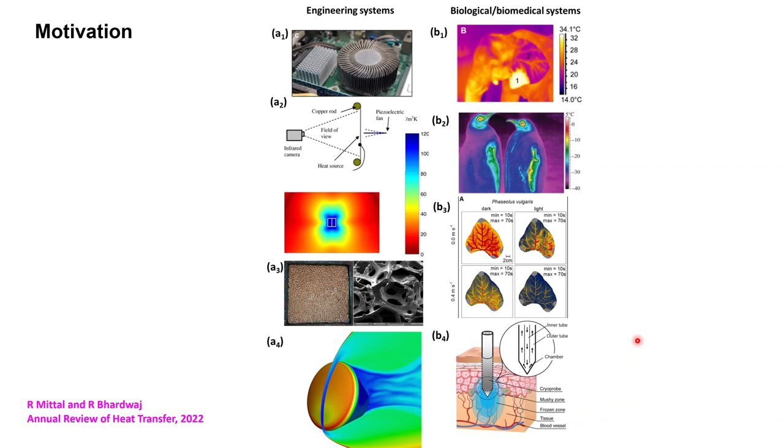So for any such system, what you actually need is to design it through accurate FSI modeling. That is the bottom line behind showing all these applications. A little bit more on that.

This is a similar idea but in more detail. Here a piezoelectric fan is used to cool the heat sinks, showing how different types of coverage could change the heat transfer.

This is an example of energy harvesting. These days there's a lot of talk about green energy and how we can go green. The available hydrokinetic energy, for example in rivers or flowing water, can be used as green energy by converting it to electrical energy through some kind of FSI system. There are already examples, and companies have been started based on this principle.

For example, Vivace is one company, with energy harvesting examples via flexible plates, such as piezoelectric plates. I'll talk a little more about this piezoelectric plate tomorrow in my last lecture. These piezoelectric membranes can also be used to extract flow energy, for example from airflow and wind energy.

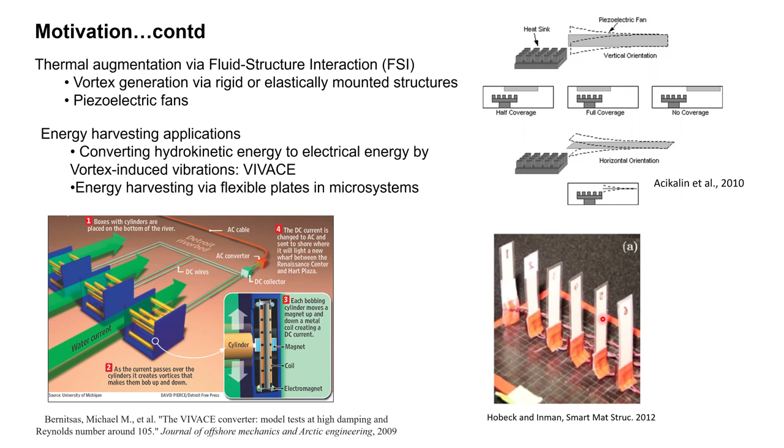So FSI modeling can be very helpful to design the system, to understand the dynamics, and to design our experiments. Let us see how we can model these systems and represent this moving boundary in a flow. Moving boundary problems in fluid dynamics are anyway harder because the boundary is moving and you have to account for many things.

With the advent of FSI, there are several challenges. For example, if the body is deforming, vibrating, and also exchanging heat with the surroundings, we are talking of multi-phase, multi-physics problems with several physics integrated, such as structural dynamics, fluid flow, and heat transfer, on top of complex 3D geometries and moving boundaries.

These boundaries can move rather than be stationary, and large scale structural deformation can occur, due to high pressure or low flexural rigidity of the structure, or very thin structures. When modeling solid mechanics or structural dynamics, we must account for geometric and material non-linearity, and when writing such solvers, we have to check whether the solver is numerically stable or not.

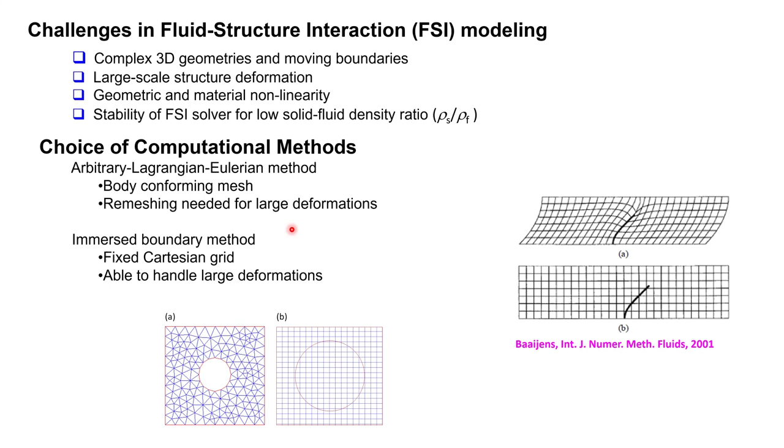So here in this talk, I'll mostly focus on IB methods, and IB methods also have a wide spectrum of methods, with a history of development of almost 30-40 years, and there are so many variants of these methods that probably some of you are already practicing and developing it.

I'll just go to selective IB methods, what has been there. If you are a beginner, this will definitely help you, because this gives you an idea about IB methods. If you are an experienced user, probably you can have a look and try to compare your variant of IB methods versus what I am showing here.

So the origins are in the 1971 thesis of Charles Peskin, where he wanted to model the fluid flow around a deforming heart. He modeled the heart in a two-dimensional geometry like massless elastic fibers.

Now, once something is moving in the flow, it's actually going to affect the fluid flow. He basically said that this movement happens, of course, with no slip boundary conditions. And there is a stress which gets generated in the elastic fiber because of the shearing of the fluid flow, or the shear stress, and that is also transmitted to the fluid. These fibers are actually massless.

Now these fibers can be represented with another grid, or another set of marker points, which we call Lagrangian markers. So now we're talking of two grids here, or two kinds of mesh. One, of course, is your fixed grid, Cartesian grid. And on top of that, you have Lagrangian markers, which are being tracked in a fashion governed by the fluid flow.

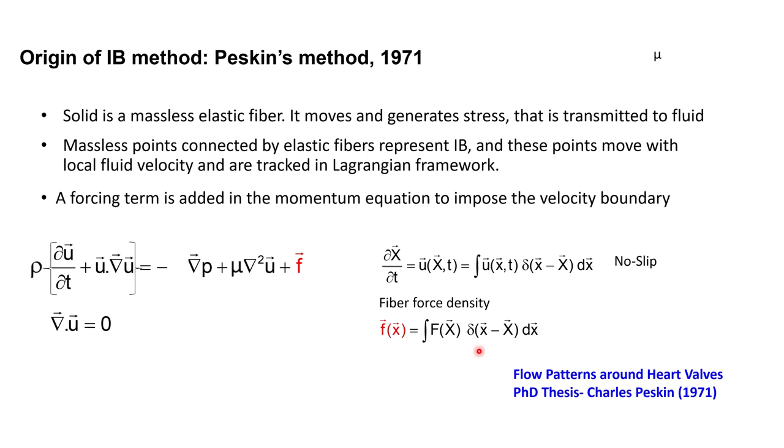Now let us see what could be the other approach. The other approach is not to add this source term. What I just explained is a primitive or earlier class called continuous forcing, which means I add a source term in the momentum equation, and everything is continuous, nothing is discrete, in the sense that I am solving the Navier-Stokes equations.

In order to account for this source term, I have to regularize it, which we will learn in subsequent slides. This will end up representing a diffuse representation of the immersed boundary, meaning the boundary condition may not be satisfied exactly on the interface, and we will learn how. That's why it is called diffuse. It will definitely be an approximate way to implement the boundary conditions, and to remove that limitation, the discrete forcing methods were introduced later.

The discrete forcing method's idea also remains similar, but not exactly the same. You have governing equations which you solve as you would without accounting for the immersed boundary. Here our immersed boundary is the surface of the solid you are trying to capture in the fluid, or any surface you have, and the flow has changed because of that. The main thing is what will happen to the flow when this boundary is introduced, with boundary conditions on the surface. So the discretization has to be adjusted near the IB to incorporate those boundary conditions.

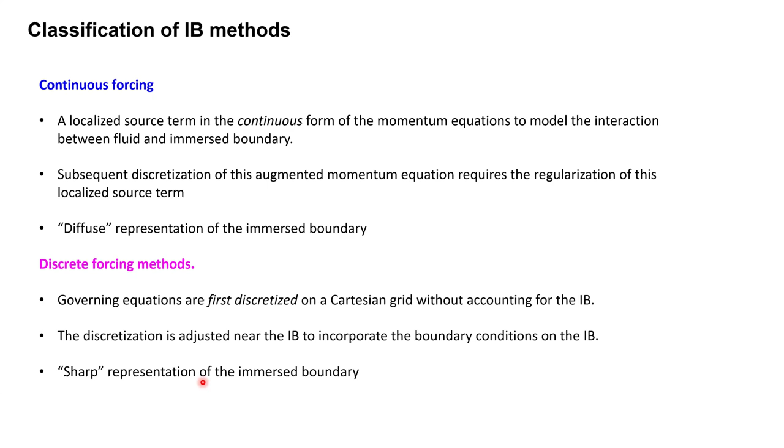And once I have those demarcations, I can apply boundary conditions on certain cells. We will discuss again subsequently what those boundary conditions are and how we apply them. But if you apply boundary conditions on these cells, which are very close to the interface, we have a sharp representation, in the sense that we are not approximating the boundary conditions on the interface.

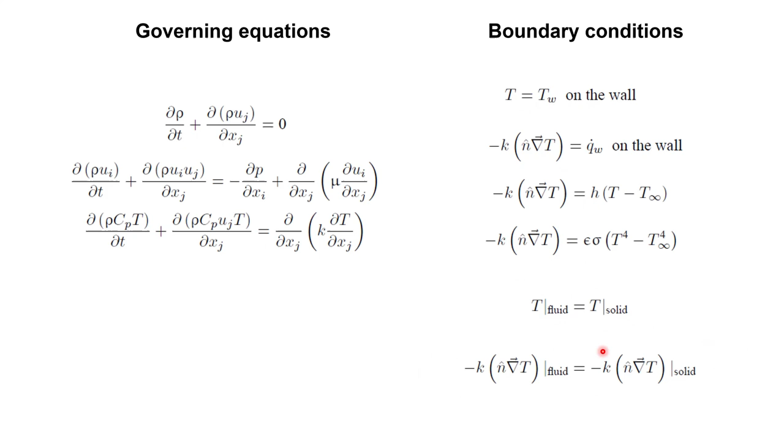So let us see this implementation so you will appreciate how easily we can implement a continuous forcing or a sharp interface IB method. There are a lot of equations on the slides. We'll go one by one.

And its units are watts per meter cube. And now this Q is implemented on the whole domain and the whole fluid.

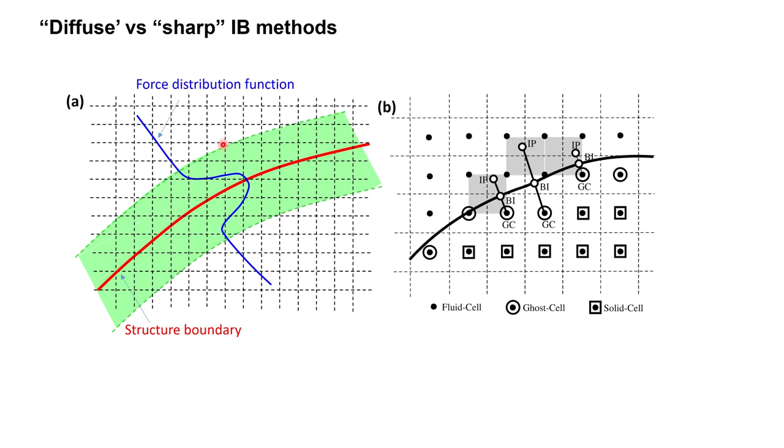But if you see this equation, it has notations i,j which represent the indices of the fluid, and then I have indices k to N, where N is the number of Lagrangian marker points. So if I go back to my figure to explain a bit more, I have Lagrangian points on this boundary, and then the indices of these cell centers are i,j. So this is the distinction, and k is the kth Lagrangian point. I have to find out that flux on each of the Lagrangian points, given by Q subscript k, and then multiply this with the discrete delta function, and this delta Sk is the spacing between the two Lagrangian points.

So the challenge here is to find this heat source distribution Q. Once I have it, I can solve my governing equation and get the results I want. So we determine the heat source distribution such that it enables the satisfaction of a thermal boundary condition, which could be a fixed temperature or heat flux on the immersed surface. One thing to note: this flux could represent any boundary condition. I have to determine this flux even for a constant wall temperature boundary condition - it is not just valid for a flux boundary condition, it is valid for all kinds of thermal boundary conditions. Whatever boundary condition is given, I have to determine this flux Q, the heat source and sink.

Now I can approximate the temperature at any Lagrangian point by the same approximation: any Eulerian temperature, if I multiply it with the discrete Dirac delta function, and multiply by h square, where h is my grid size, that approximates my Lagrangian grid point Tk.

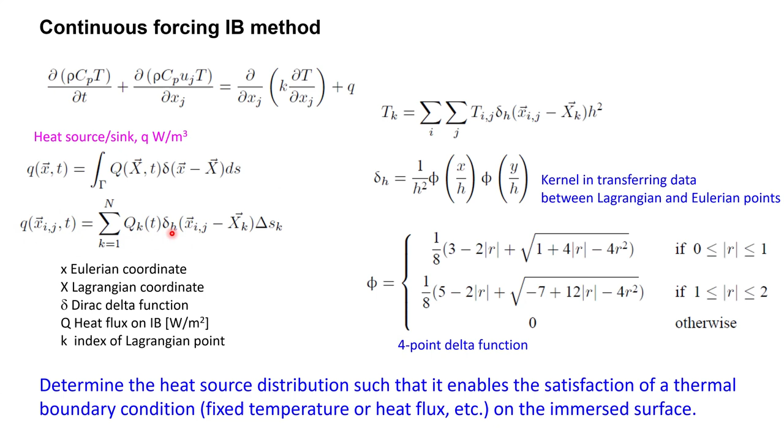Now I can substitute small q in terms of capital Q and recall this equation - you are probably with me. So if you see this equation, I can represent my Eulerian value for the heat source in terms of the Lagrangian heat flux. This equation I'm going to utilize, and once I utilize it, I'm going to get an equation.

Now let's look at this equation. This is actually our final form, just to solve and let us understand what we have done. Any Lagrangian point temperature at that particular time step which we want to determine can be given in terms of its corrector temperature with a discrete Dirac delta function, and also in terms of the flux on all Lagrangian points. When we substitute this, we get a sum over all the Lagrangian points - notice this M is for all the Lagrangian points, ranging from 1 to capital N. Then I get additional terms, all of which I know. What I don't know is this term Qm.

But luckily I have the boundary conditions, so I know this value because I know the temperature at the wall. Let us say I know the temperature at the wall, which is a Dirichlet boundary condition. I know the right and left hand side. This term also I know because I know the corrector time. What I don't know is this.

But now I can solve this Qn plus 1. But this is just one equation. I will have almost like capital N number of equations, because I have that many Lagrangian points. So actually I can solve a system of linear algebraic equations whose size you can easily determine, and the total points are from 1 to capital N.

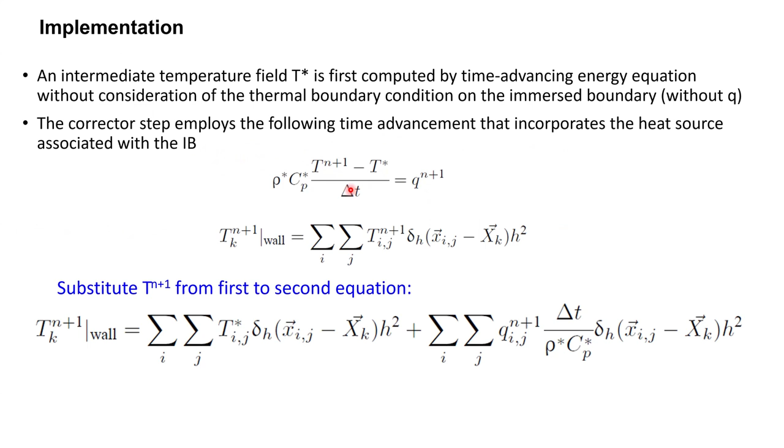And once I solve the system of equations, I can solve for Qn plus 1. Now Qn plus 1 is given to me, known. I can go back and use this equation to find Q, small q, that is my heat source, right? And now once I have this, I can go back to this equation and solve my temperature. So you can easily implement this source term given those Lagrangian points to find out your new temperature field. This is the implementation of continuous IB method.

Now, of course, you can argue, what if I'm given a different boundary condition? Other boundary conditions are also very easy to implement. Now let us talk of the flux boundary condition. For the flux, you can define an additional virtual layer of points which are equal to our total Lagrangian points, which is away at a grid spacing H outside the boundary.

Let us call it VB. Why call VB virtual boundary? Because it is anyway not there. This is for our computational tractability that we define and use this. And it's also aligned in a direction normal to the IB because we are using a flux boundary condition. Now I can approximate my flux at the wall as Tk at any Lagrangian point at the VB virtual boundary minus Tk at the wall, divided by H, because I have taken these points away at distance H.

Now if I rearrange the term here, I get Tk at any Lagrangian point at n plus 1 time at the wall in terms of the flux and Tk n plus 1 at VB. Now Tk n plus 1 at VB you can determine using interpolation, and that interpolation is something we are using already. So this VB value can be determined using this equation. This way I get a slightly different form of this equation for the flux boundary conditions, and you can also implement the flux boundary condition.

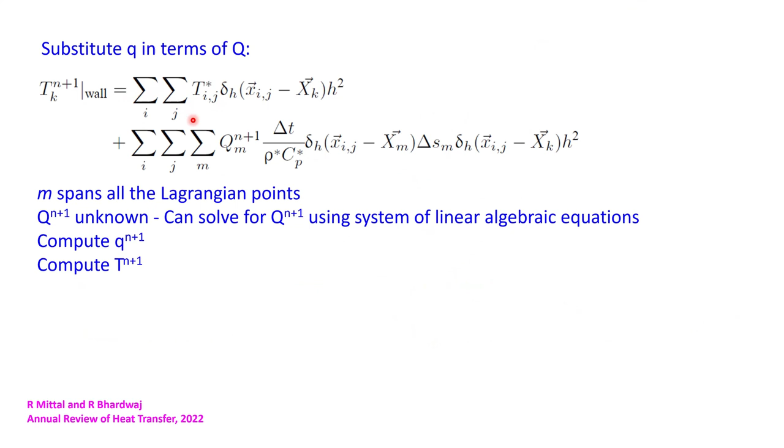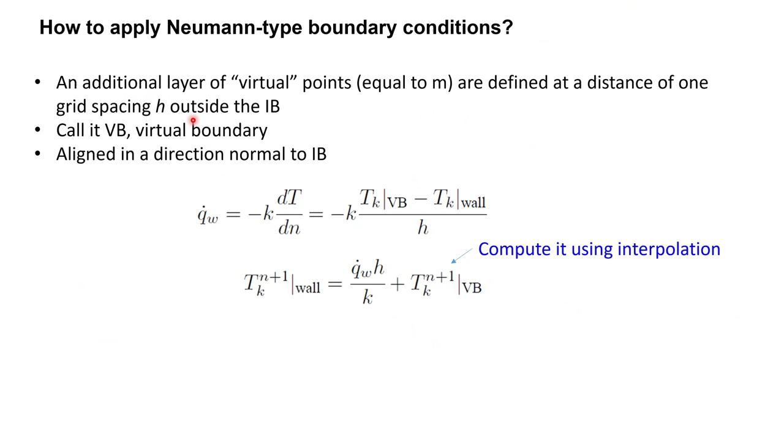With these two basic boundary conditions, you can also implement the mixed type boundary condition. You can also implement any radiative boundary conditions. So with this framework, you can easily implement the continuous IB method. Of course, you may have several questions regarding grid size and what if we refine it, and how the accuracy changes, and that's something we can also discuss once we have completed the presentation. But the bottom line is the continuous forcing method is easy to implement if you are given a geometry, and you approximate the effect of it using a source term in your governing equation.

So with this, let me move to the discrete forcing method. In that we have a different approach, and this is our boundary, the solid-liquid interface. What we need to do first is identify different kinds of cells. These cells are called solid, fluid, and ghost cells. Now we can see here, I am putting different kinds of dots. This is for fluid, this is for ghost, this one for ghost, and the solid cells.

So of course, cells which are in solid, they are solid. Cells which are in fluid, they are fluid. But what are the ghost cells? The ghost cells are those cells which are in the solid but have a closest neighbor to a solid... I mean to a fluid cell. So every ghost cell is a closest neighbor to the fluid cell. This is the definition of ghost cells, and we will call them ghost cells. I'll tell you later why.

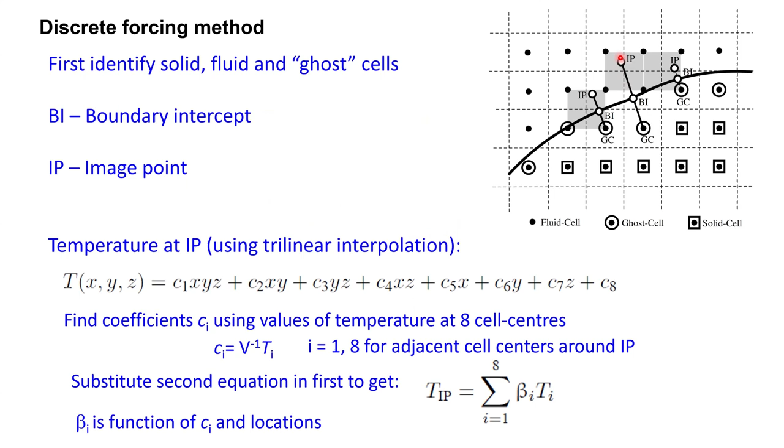One thing you can quickly notice is that we used a central difference method for the sharp interface, whereas when we applied the flux boundary condition for the continuous IB, we used a first order discretization, not second order accurate. So you can see the accuracy actually improves very close to the interface if you use the flux boundary condition this way. The sharp interface method is better, but it requires more framework and identifying the cells, so the computational infrastructure required is more than the continuous method.

On the other hand, the continuous method is easy to implement and also computationally inexpensive.

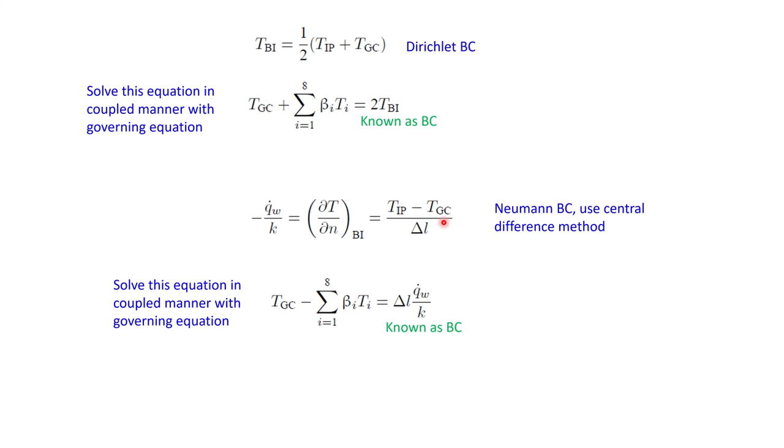Now, one last thing I would like to say is how would you implement a conjugate heat transfer boundary condition? That is something of an extension of the previous framework, and we can understand it very easily. We've understood how to apply the flux and the Dirichlet boundary condition in the previous slide, using the ghost cells and the image point, where ghost cells are in the solid and the IP is in the fluid.

Now, if you have a conjugate heat transfer, you are also solving the heat transfer in the solid, so you have to define something called mirror ghost cells and mirror IP. You can see in this figure where you identify all these cells, IP in the solid and IP in the fluid as well. First you do as you do for the solid and fluid, then you go back and do it again for the solid.

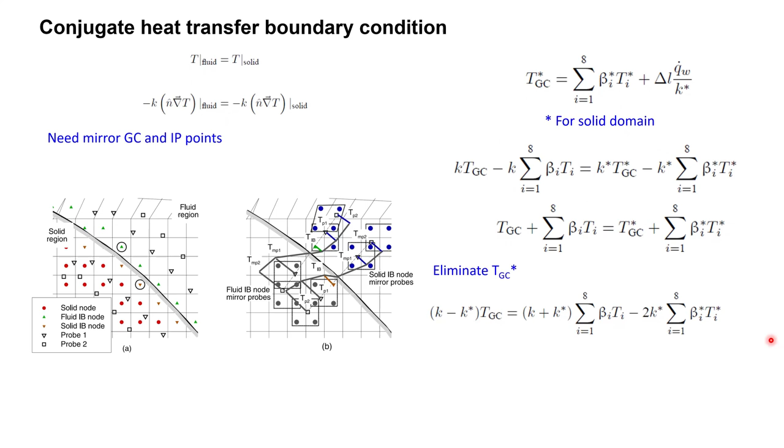So here is the formulation. This is something we have done before, but we just put the stars, which denote the solid domain. Once you have this equation, we can apply these two boundary conditions easily: the flux boundary condition at the interface, and the temperature condition. If you do some reworking here, you get a single equation which will ensure that your conjugate heat transfer boundary condition can be applied easily.

Okay, so this is just how to tackle the structure boundary equation in the fluid. Now, let's say you want to solve for the structure dynamics itself, and you not only have structure dynamics but also fluid dynamics, so you have two kinds of systems that have to be solved together.

Of course, it's much easier if you just make a single governing equation, which is actually called the monolithic approach, and then you write a solver from scratch that accounts for both together. This has been done by several groups as well.

But what is more common is the partition approach, because a fluid mechanician started to integrate structure dynamics into the code available to them. This is called the partition approach, where you have a fluid solver already, and the structure solver is something you get from somewhere, or it's open source code, or you write a small structure code, and then you solve it in an iterative fashion.

So the partition approach uses existing fluid and structure solvers. Of course you can write the structure solver yourself, but it's more common to use both existing ones, and it has a larger computational time compared to monolithic, because you have to iterate back and forth between the fluid and the structure solver.

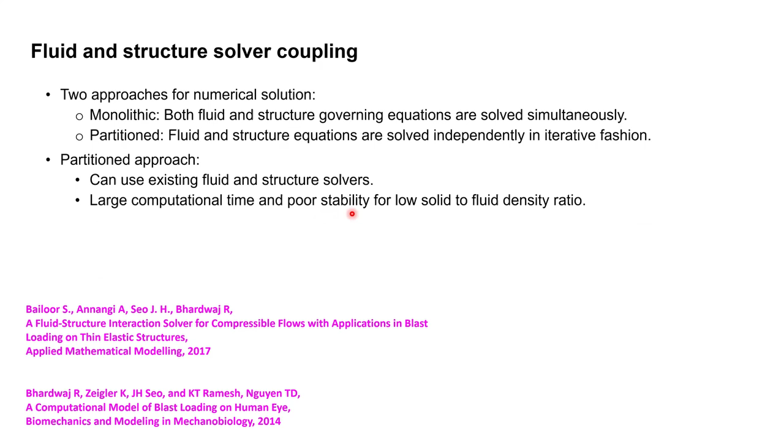And then once you are having two solvers, you are talking of stability issues, especially when things are moving faster and in large magnitude.

Okay, so partition approach works like this. You have a fluid, you have a solid, and you go back and forth to exchange the data. And this data is actually the boundary condition, kinematic and dynamic boundary conditions. So the first match is of the solid displacement and surface velocity in the flow solver and the structure solver. And the second match is the fluid dynamic forces on the structure, which will help in generating the stresses in the solid.

So these two conditions simultaneously should be satisfied while you are announcing a convergence to your solution. So fluid computation can be done on Eulerian grid if you are using an IB method, and then immersed surfaces which you can track in Lagrangian framework, either in continuous framework or a sharp interface. And then you may have another solver, structure solver, which may be using some scheme, let's say finite element method, and that solver also has to be coupled. So that finite element solver needs to see also those Lagrangian points, and the Eulerian grid also needs to see those Lagrangian points.

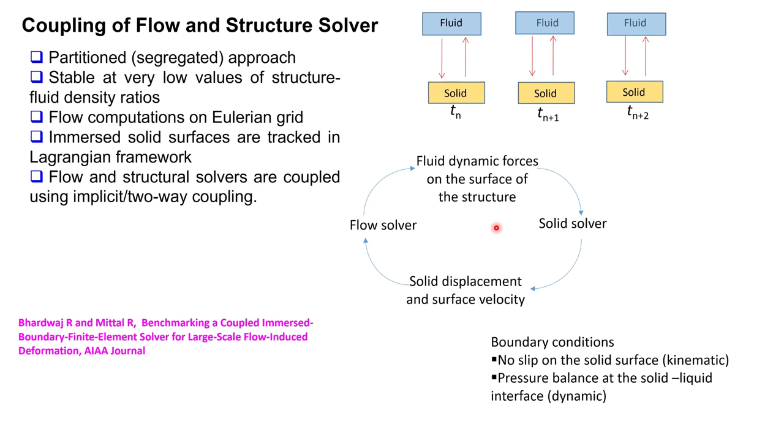So probably you get the idea. You need to solve boundary conditions on two solvers, and they have to be satisfied together. Now let us see how we can achieve the numerical stability of such situations.

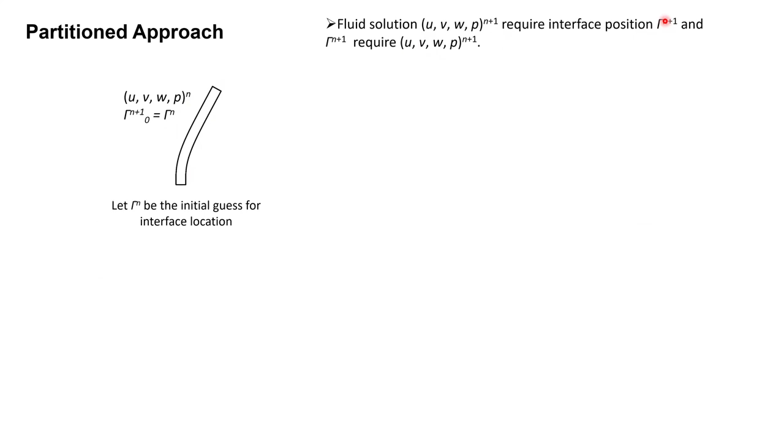So let us say I already have a plate which is deforming, and the solution is obtained at nth time step, and I'm looking for the solution at n+1 time step. And also I have the deformation available, I'm calling it with a big gamma, and this is just my first iteration. Now what I need is the solution at n+1, which includes all the velocity and pressure field, and also the interface position. And of course, I'm going to need also the stresses inside the solid and things like that.

Now I call the fluid solver and solve a time marching problem, as I have done probably in regular cases before. So that gave me n+1 data for the pressure field and the velocity field. And now this will have a certain force which is applied on this solid, and then you will have certain deformation. And that deformation, of course, is this. Now, that deformation is here in this particular step.

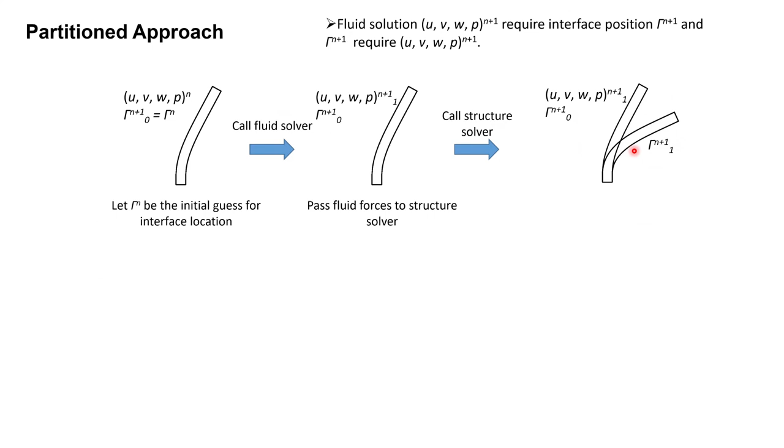Now, the question is whether this deformation is going to satisfy the boundary condition, in the sense that when you have matched this fluid flow from this to this, you may have a certain field, but that may not be exactly satisfying the boundary conditions. For that, you have to check and go back to the fluid solver and check whether essentially it is true. So we can use an under-relaxing parameter, and we can under-relax any variable of your choice, let's say interface velocity or interface position, and then you under-relax, and then again check, go back to the fluid solver to see whether my solution has been converging or not converging.

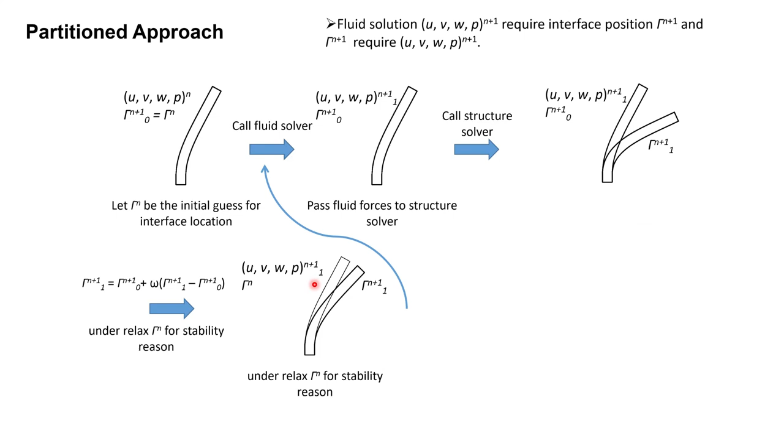Okay, so let me put this thing, if it is looking complex, in an algorithmic form. So here it is: first you solve for the flow and pressure field, then you solve for fluid dynamic forces. And then you solve for the deformation and stresses, and then you actually get a new interface position and the velocity. There may be more values for everything, but these are the things I am more concerned with, because these are the things going to talk to the fluid solver.

Now I calculate the residue between my old and new. Remember, this is not the old time step, this is the old iteration. So I am having a global time marching for my fluid solver if I'm integrating a structure in it. But then also I am sub-iterating within that step with the structure solver. So this is the old of my sub-iterations, which I have designed for converging the solid and fluid together.

So I announce two residuals: one is based on interface position and the other is based on interface velocity, and I can check which residual is larger. And then if it is not converging, I can go back, under-relax, and then feed this old value and the new values I have obtained here, back to the old ones, and again go back. And I keep checking until my residual goes almost to zero.

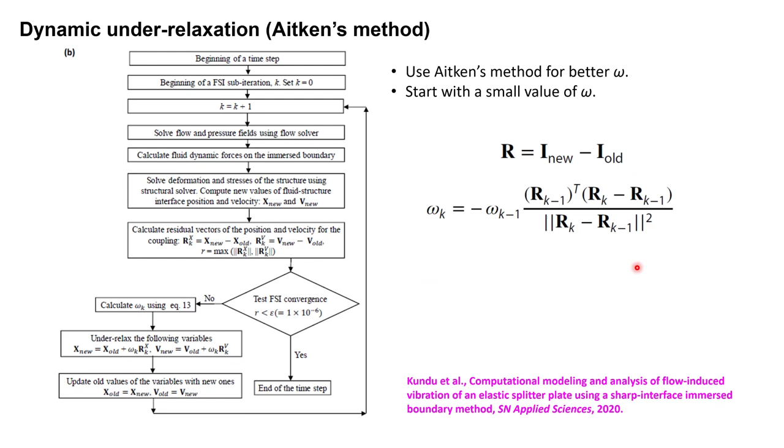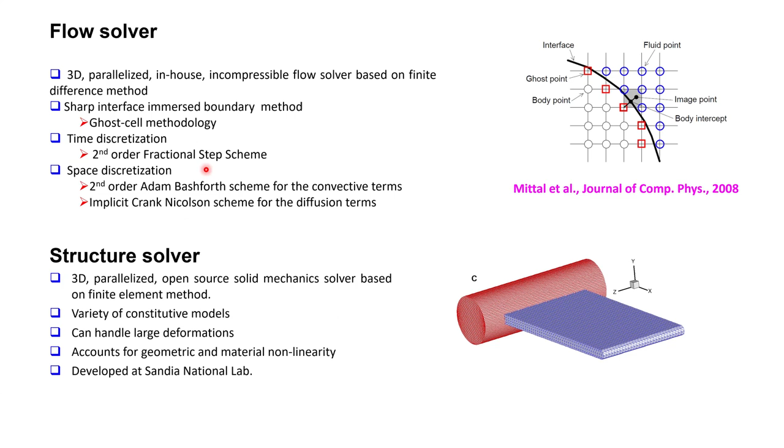Now let us see what kind of results we get from such schemes. We have used an implicit partitioned sharp interface IB method, originally developed in Professor Rajat Mittal's group at Johns Hopkins. Since then we have extended it for thermofluids and viscoelastic structures, among other things. The structure solver we use is open source, developed at Sandia National Lab, based on the finite element method. This is a typical surface grid for our code: a cylinder attached with a 3D plate, and the flow solver is second order accurate, using a ghost cell methodology and other second order schemes.

Now consider the famous Turek and Hron FSI benchmark problem, simulated by several groups. Here the cylinder is stationary and there is an elastic plate which deforms under vortex shedding or pressure forces, and it sustains vibrations because it locks to the fluid frequency. This is a low Reynolds number problem, and the density ratio, around 10, matters here. The non-dimensional Young's modulus is 1.4E3, and we use a linear elastic model.

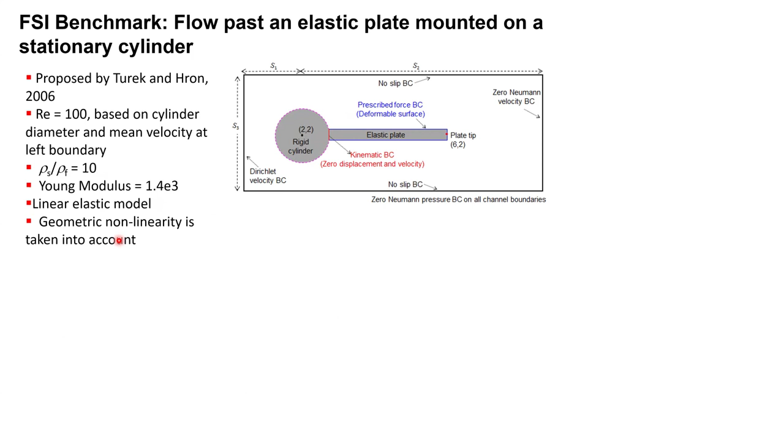In this model we take geometric non-linearity into account, meaning that if there is large deformation, we account for those effects, but the structure material itself remains elastic. That is the meaning of this linear elastic model.

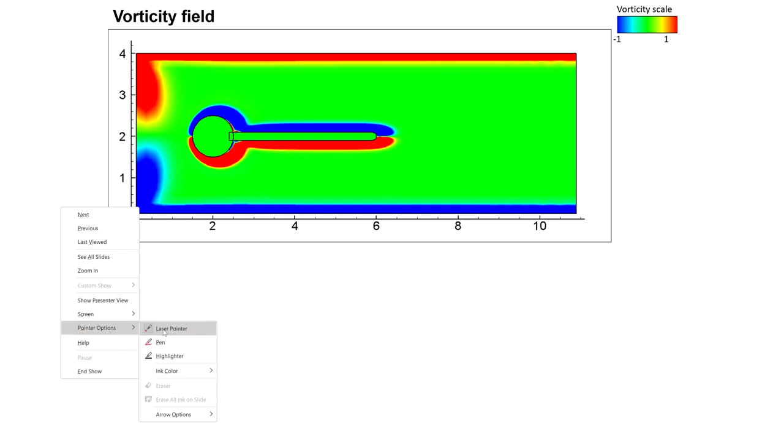Let me show you the movie of the vortex shedding. You can see how the plate starts to deform and attains a self-sustained vibration, with vortex shedding occurring downstream.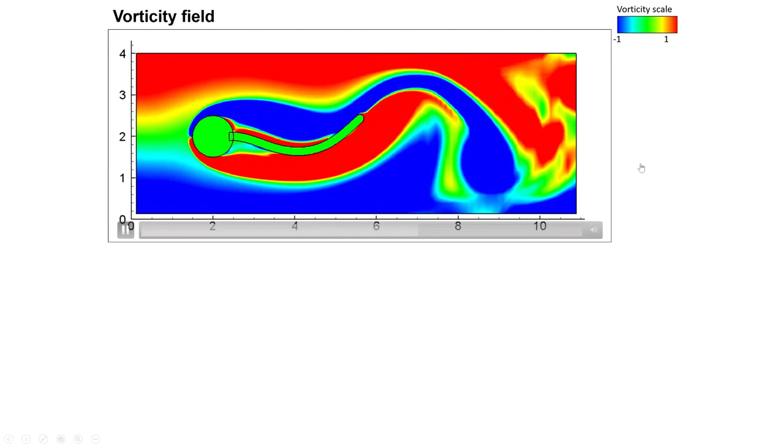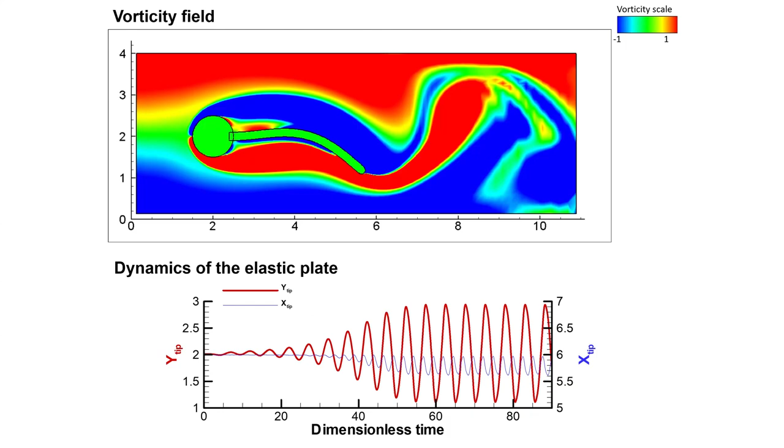Now if we plot the evolution of the tip of the plate, it looks like this. This is the Y displacement, which attains a self-sustained state, and this is the X displacement, which is slightly smaller than the Y tip. We can compare the Y tip, which has been benchmarked in several studies, and here we've benchmarked it well. It agrees well with the earlier data.

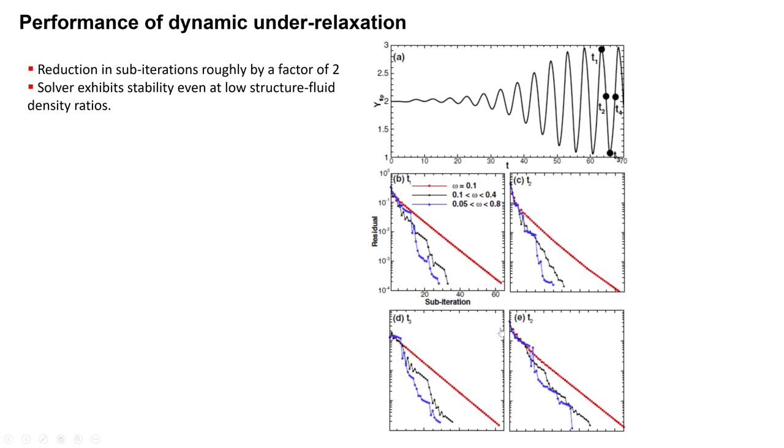We also tested the performance of our under relaxation. In this problem we chose certain times to plot the convergence. The red curve is without dynamic under relaxation, a constant value, while the blue and black curves show dynamic under relaxation. There's a slight difference because we set limits on the under relaxation parameters, with the smallest being 0.1 and the largest 0.4. The bottom line is it gives a good improvement in computational time, on the order of 50% reduction.

We have done other problems too. For example, a thin plate attached on a square cylinder, where you can see the mesh is refined quite a bit to accurately capture the motion of the plate. That problem uses a slightly larger Reynolds number and larger density ratio, and is also a linear elastic model. Our solution agrees well with the published results.

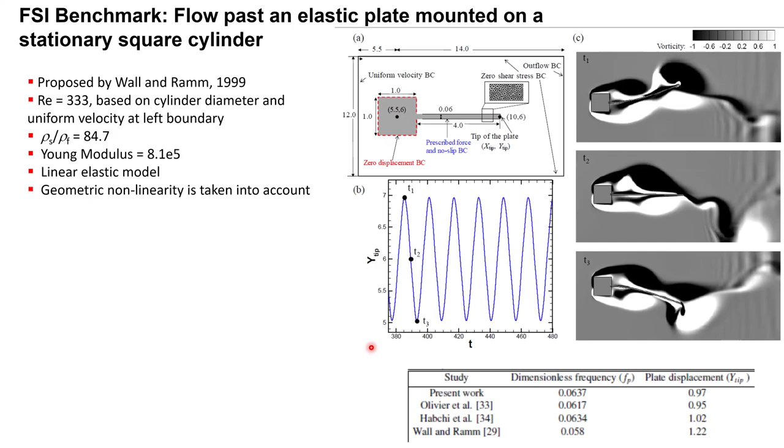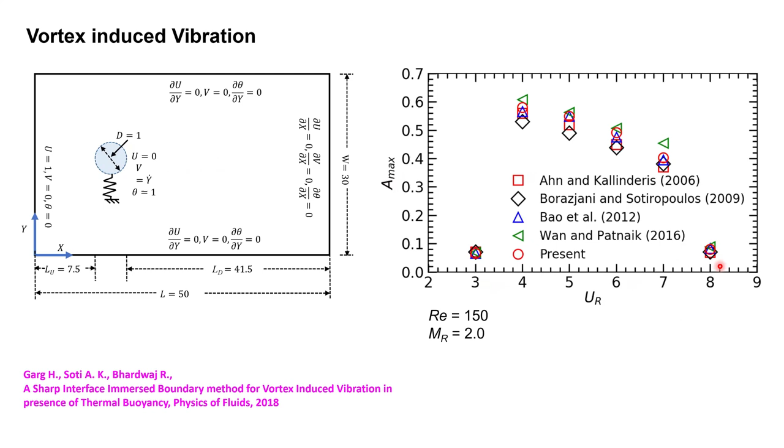Another problem we validated is vortex induced vibration, where a cylinder is mounted on a spring and undergoes vibration. Professor Mittal has already talked about lock-in in the workshop, so some of you are familiar with this physical phenomenon. The cylinder vibrates, and we compare the maximum amplitude or maximum displacement of this signal, plotted with respect to the reduced velocity, comparing well with other studies.

We have also validated the code in presence of thermal buoyancy. We implemented thermal buoyancy using the Boussinesq approximation, which means a linear variation of density, only with the temperature gradient. Here we compared with earlier results and it agrees very well.

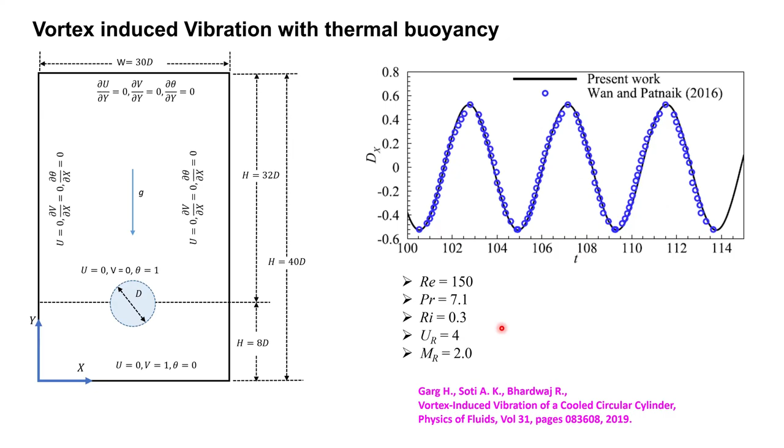In the context of biolocomotion, we have validated our code for a moving or flapping rigid ellipse. These are the motions of the ellipse in two cycles, forward and backward. This is the published result, and this is our result. The comparison captures all, mostly all, the peaks in the lift and drag signal.

As intended, you can see there is a lift generation in this FSI system, which is showing a positive lift.

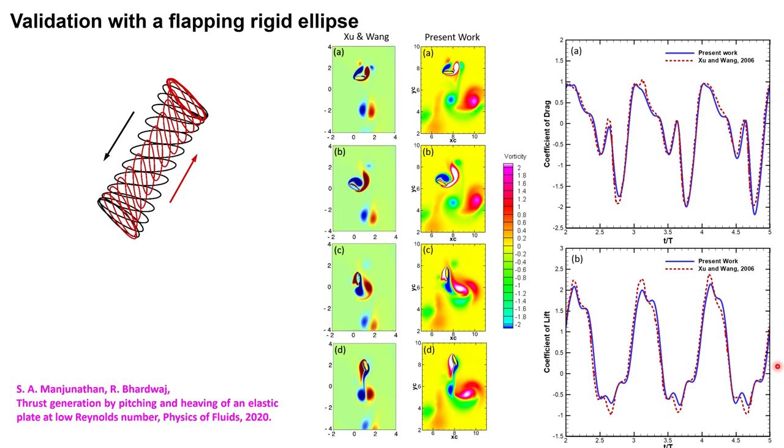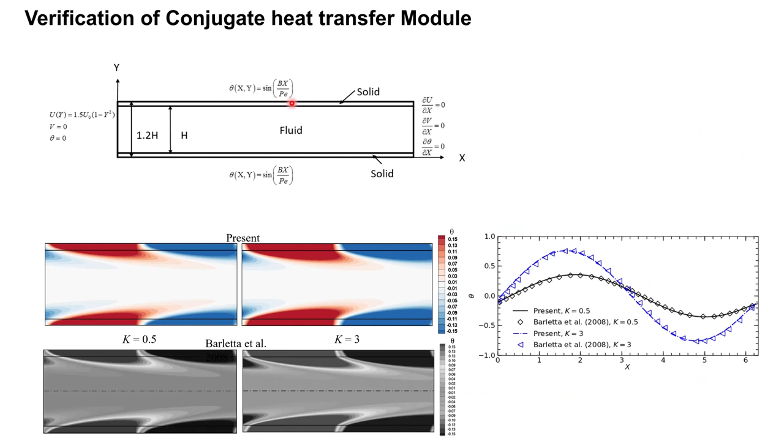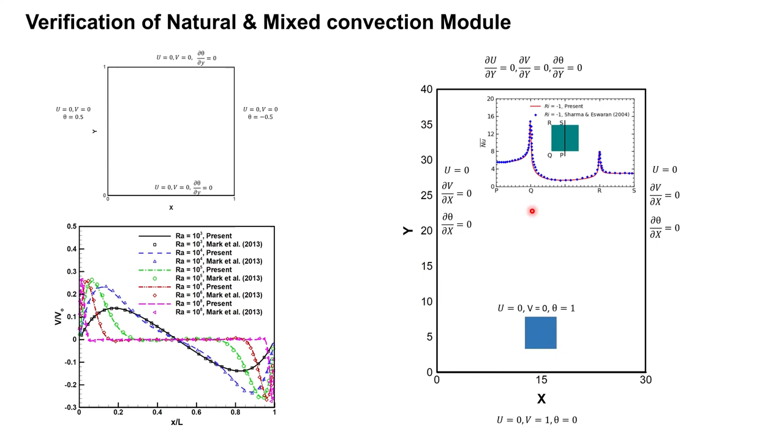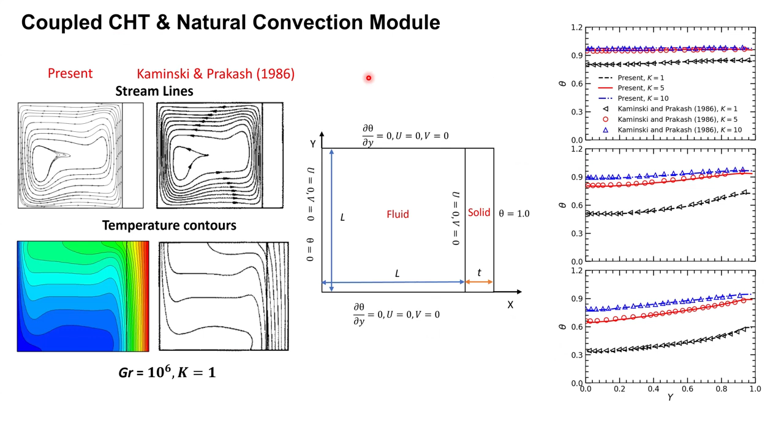So other tests, such as coupled conjugate heat transfer and natural convection, we also convincingly obtained. We also did a problem with conjugate heat transfer and large scale deformation that I haven't put here, but that is also possible with our method.

Now let me talk a little bit more physics.

Can anybody update me how much time I have? It's 5 to 10 minutes. Okay, I'll try to finish in 10 minutes. And whatever I could not present today, I can integrate and present in tomorrow's lecture.

So now I'm going to talk, apart from the numerical methodology, about some of the applications in thermofluids, and also talk a little bit of physics in these systems, in this FSI system.

So we integrated a thermofluid problem in FSI, the same Turek and Hron problem I was showing, where we solved the temperature field. Here we are using heated boundaries and an insulated boundary for the cylinder and the plate. The idea is to see whether this motion of the plate can improve the heat transfer or not.

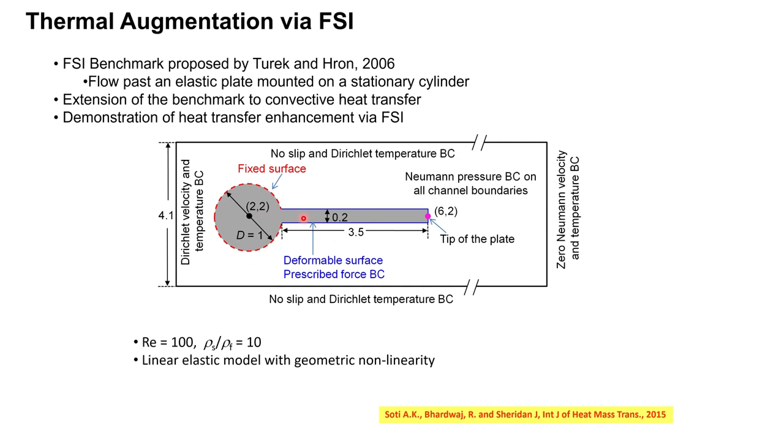So here is the movie I want to play. You can see the cylinder is attached with an elastic plate, and the plate is attaining self-sustained oscillation, and the downstream is really long in order to capture that thermofluidic behavior.

So the third row is the vorticity, and the fourth is the plot of Nusselt number on the walls. Whenever the signal is going up, meaning the Nusselt number is getting larger, which is actually what we want, a larger Nusselt number for improvement of heat transfer. This part is showing the isotherms. Basically, this red color here is actually the thermal boundary layer.

The idea is simple here. The vortices generating from the tip of the plate are hitting the wall and thinning down the boundary layer. If you have taken any course on convective heat transfer, you probably know that the thermal boundary layer is a kind of resistance to the improvement of heat transfer. All you want to do is disrupt that thermal boundary layer to improve the heat transfer.

And that is exactly what the system is doing: these vortices interacting with the thermal boundary layer, thinning it down and improving heat transfer, as you can see here. By its very design, the signals are out of phase, and there is always a phase difference, because the vortices are hitting at different times.

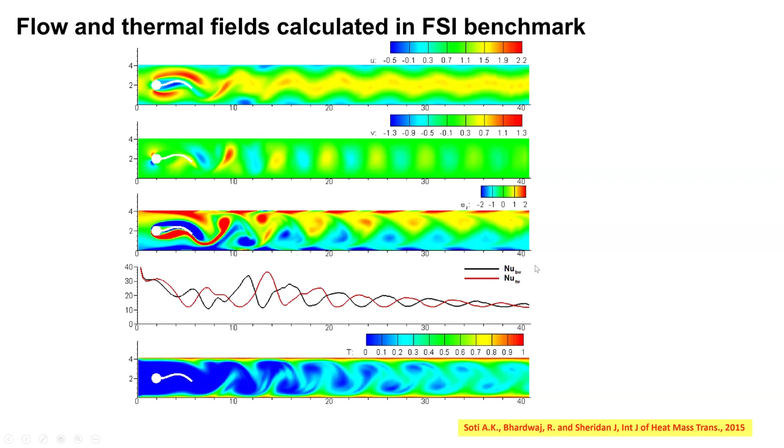But whether it is good enough is something we test in the next slides. For that, we compare this system with basic systems: one is the pure channel, nothing there, and the second is the cylinder, which as you can see here generates these vortices. I'm plotting the vorticity and isotherms in these systems as well.

And the third case is a plate, but a very rigid one. It cannot deform; its stiffness is very high. So here also you can see the shear layers, which are not able to create vortex shedding.

And here you can see the isotherms for the 4th case, which we were discussing, which is a passive way to improve the heat transfer. You can see the thinning down of the boundary layers and things like that. So this is at least giving qualitative information.

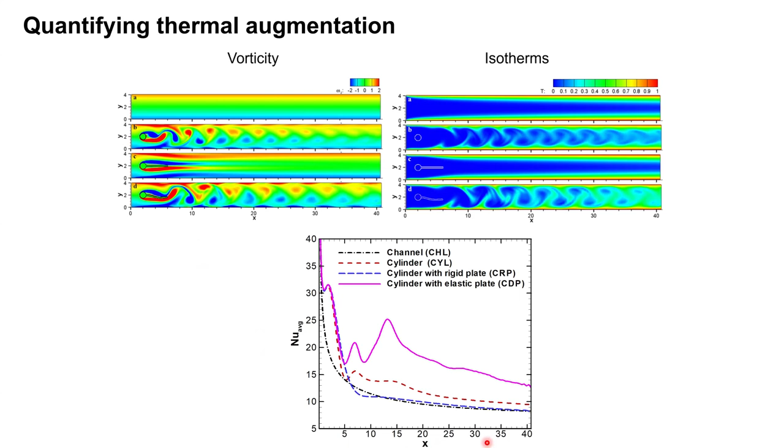To be quantitative, we plot the Nusselt number, time averaged because it's a cyclic process—the vortex shedding itself is harmonic. So we time average in all cases, and with respect to space we are plotting this for the downstream. You can see the black signal, which is just the pure channel, and that should match with the analytical results you learned in your convective heat transfer course.

Now once you put the cylinder, the red one, you see some vortices which are also helping to improve the heat transfer. This is the red signal, but it's still not good enough.

The third is the rigid plate with a cylinder. That case is the worst, because it also does not have any vortex shedding, and sometimes it is even lesser than the channel itself. Now the 4th case, which is our present case, you can see these two big peaks actually helping to improve the heat transfer, and that peak is significantly showing in the downstream. The vortices are being hit at these locations.

So not only does it improve the heat transfer, but this analysis also tells us where it will improve a lot. So if you have some kind of non-uniform heating or non-uniform load to be removed, that method can be used. Another thing about this method is that it's a passive method—there are no active motors or anything involved. Passive cooling is desired and preferred if you look at the heat transfer literature.

Now how do we assess its efficiency, how much it is efficient? Because when you do that, you also create a pressure drop in the channel. It is coming at a cost.

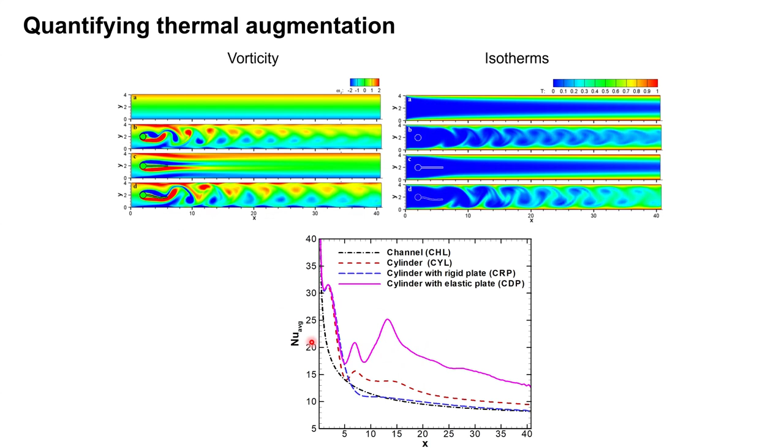For that, we define an efficiency, which is simply eta h by eta f. Eta h is the mean Nusselt number, averaged over both time and space, divided by the Nusselt number for the channel—so I'm basing everything on the channel. And eta f is P average, how much power I have to use to drive this flow, divided by P average for the channel. So this ratio basically accounts for both things: the pressure drop, and my efficiency based on the channel, how much I'm able to improve with respect to the channel.

So look at the Nusselt number first. These are different simulations that have been done—we varied the Reynolds number, we varied the Prandtl number, and we also varied the non-dimensional modulus of elasticity. Clearly, if you see the case where CHL is for channel and cylinder, and this is for rigid plate and deformable plate, the deformable plate result is huge, as you can see here.

Now compared to these two cases, CYL and CRP, it is also more efficient. As you see in this plot, the efficiency is larger, so simply using cylinder or rigid plate, I would rather use this deformable plate because it gives a larger efficiency compared to the other two. You can see the power is larger in the deformable case because the plate vibrates to a larger extent, and of course it increases the blockage ratio, so the power spent is more. But on the other hand, I also get more improvement, and overall this process is more efficient.

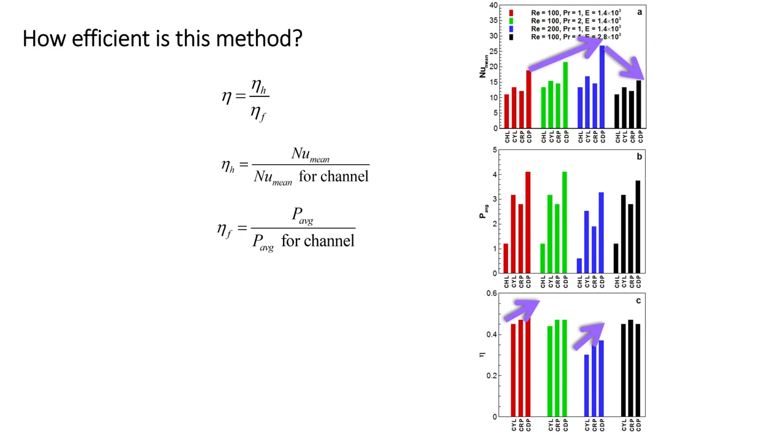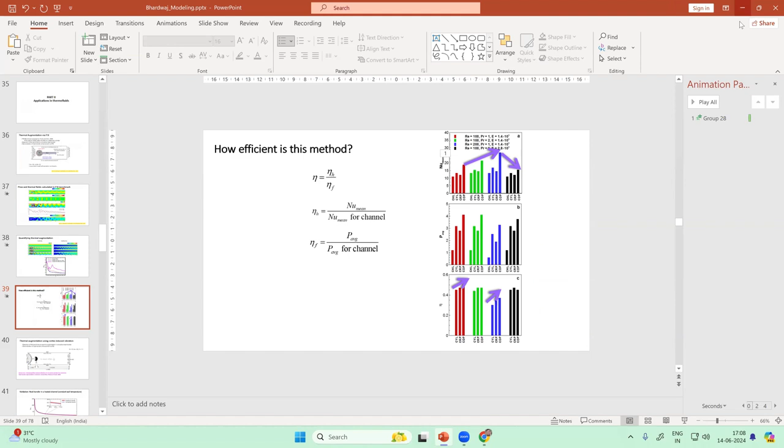So maybe in the interest of time, and I'd like to hear from the audience, I would stop here. I have some slides left, but I would like to integrate them into tomorrow's lecture. So probably it is fine right now if we can take questions.